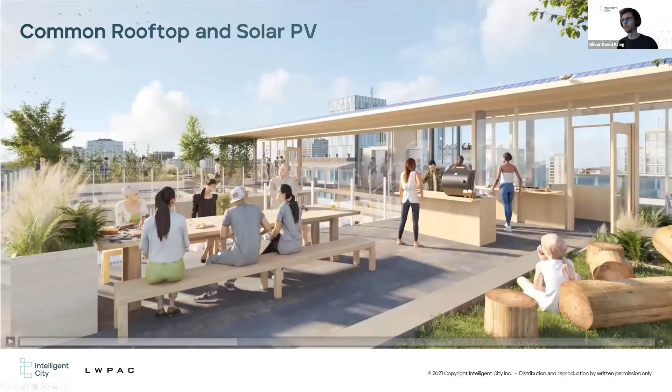Okay, fantastic. I hope you can hear me. Yeah, okay, great. OD is sharing the screen. There we go. Nope, wrong one. Wrong one. Sorry for that.

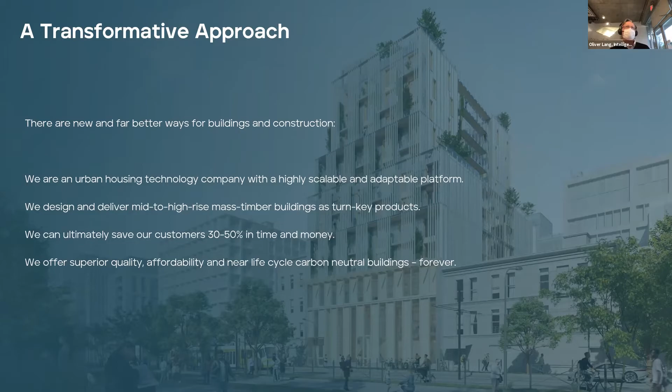Next. So you know these. I can kind of skip over this a little bit, but just as a reminder. So we focus on the housing market, urban housing market, and it's a massive market. It's an $8.8 trillion annual market in the world. We need to build over 1 trillion square feet of urban housing in the next less than 30 years now. And people and cities demand that we overcome this affordability and housing crisis that we have in almost all successful metropolitan areas in the world, and that we come up with better solutions.

And while we're facing that problem, we're similarly facing the issue that buildings, when you add in all the key issues and the key metrics, are essentially responsible for almost 40% of GHG emissions. And so stakeholders are now demanding, at least where we are located, that we do a lot better, that we come up with a path to carbon neutral building and breakthrough sustainability approaches, not sometime in the future, but really now, and get our buildings ready.

And so the industry is really facing two really big problems right now. And yet, as an industry, we're the last laggard. We haven't really seen any significant innovation that helps us, and we continue to be slow, expensive, risky, and really just one-off buildings. And even with the advancements we see in mass timber and so forth, it's still one-off buildings.

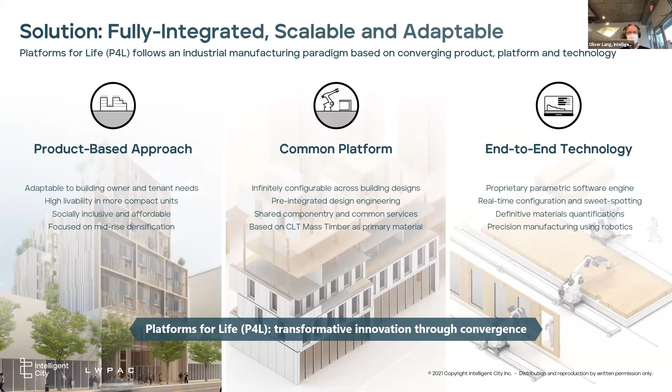So when I talk about scalability, there are two things that matter. And that creates sort of the design space for which we've created the whole system, which is in order to get to replicability in a market that requires variation by nature, because the sites are different, but also the uses are different. Housing cannot be uniform. We're not all the same. We demand the possibility for adaptability, and so do our clients, and so do municipalities,

which is very different from, let's say, if you build hotels or classrooms or anything that you could basically design on the basis of a unit or a cell. It's been useful, but for housing, that doesn't work at all. So you need something that's highly adaptable in order to ensure replicability and scalability so that you can get market penetration.

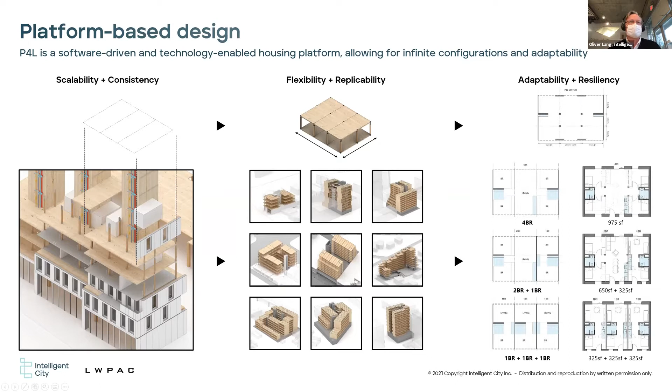So, as I said, we have a sort of front-end parametric design software engine that we've been working on for some time that allows us to set the building, fine-tune it, link it to databases about materials, carbon, cost, and the overall performance, and create a virtual twin model so that we don't really have to figure anything out on site. It's all being done and tested and integrated on the computer, and from there it gets reported out into industry standard BIM models or into machine code for the robotics.

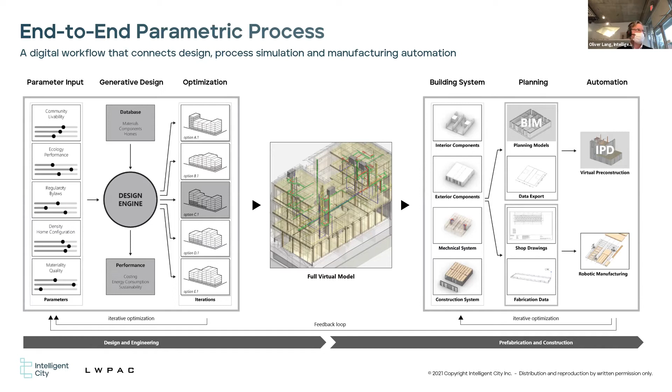So there are three main issues where we have our focus, because that's where we ultimately need to get the product to. Our customers find mass timber very sexy, and it's all wonderful, but at the end they really care about affordability, sustainability, and livability, and creating communities, right? And that's what we have to create for. So let me quickly walk you through that and how the system helps with these three issues.

In this approach, to get to affordability, we need to get multiple benefits going at the same time, because right now the way the industry works is really only about what's your dollar per square foot, what's your cost, right? And it's very hard to have any meaningful value discussion. And with mass timber, we have the possibility to get to that.

So buildings need to stay flexible so they can be adapted, and then we use building science to create better longevity. So that means we have to work off-site. We have to prefabricate to integrate quality control and get the speed advantages. And that's where the material shines, because we started out looking at prefabrication of steel and concrete, and none of that really was great.

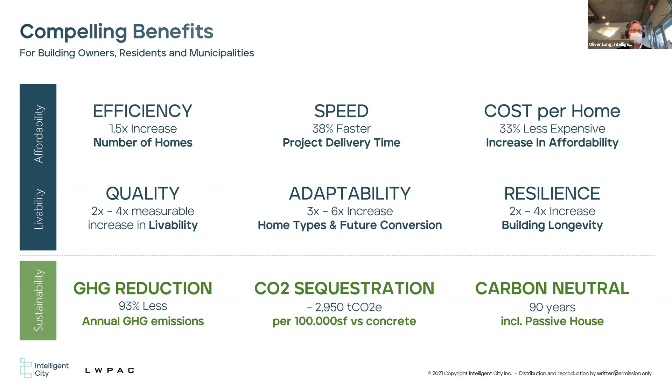And then there's the efficiency I talked about. So we've spent a lot of time looking at that integration of systems and how that works between prefabrication dimension, what you can ship, what people want, natural cross ventilation, access to daylight, flexible floor plans, to make even a small home usable for a couple or with a small child and so forth.

And how can we change it? And so while going through all these different typologies, we can find meaningful savings in the efficiencies, and that of course brings down your cost to rent an apartment or buy an apartment quite dramatically.

So the other issue, when you use an integrated approach where you not just think about the system and the prefabrication at the end of the chain, but you take prefabrication to the beginning, and you therefore have the possibility to read out all critical project data at the beginning, you can start to show people not just what it will take and cost to build it, but in fact what it will take and cost to operate it.

Because at the end of the day, what's interesting about buildings is that essentially you can bring down the discussion very much to a question of geometry and physics, and you can use that in computation and through math and intelligent algorithms to really understand these buildings in a much more complete way and link it to climate data and everything that's necessary to determine this.

And of course, there's the cultural dimension, and you want to have people being happy. But we feel we can even go as far as to bring ideas of computation and quantification to the qualitative, like livability issues and daylight and everything that sort of makes us comfortable in a building.

So the integration of the thinking really leads us to an incredible amount of efficiency gains across the board, because we know from the beginning what the prefabricated component will be like and how it will integrate. But the computational power allows us to work through that, even if the buildings vary from site to site. Next.

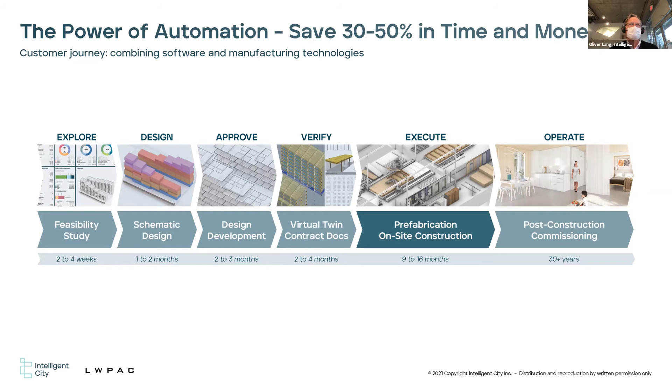So we don't just design one building, we go through a whole range of them. We make sure that the building stays consistent and then we can help.

I think you cut off there, Oliver.

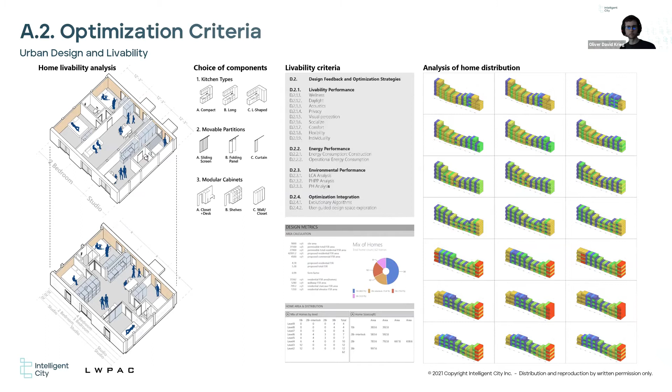Next. Okay, so the power of prefabrication is then really that you can find these sort of compounded efficiency gains, while in comparison incumbent buildings, at least in our part of the world, we see consistent cost escalation because of labor shortages, and prices in the Pacific Northwest, like in Vancouver, keep going up by about 5% a year for construction. And using data from other industries where automation has been deployed, we reduce the cost of building for the hard cost and the soft cost.

But there's the additional effect of the life cycle cost, which really matters for our clients just the same: when you do a building and you can quality control it, and you can extend the life cycle from 40 years to 100 or 120 years by using offsite prefabrication, building science, and quality-controlled material like mass timber, you can dramatically decrease the depreciation or increase the value retention in the building, reduce your operating expenses and maintenance cost, and generate data about this.

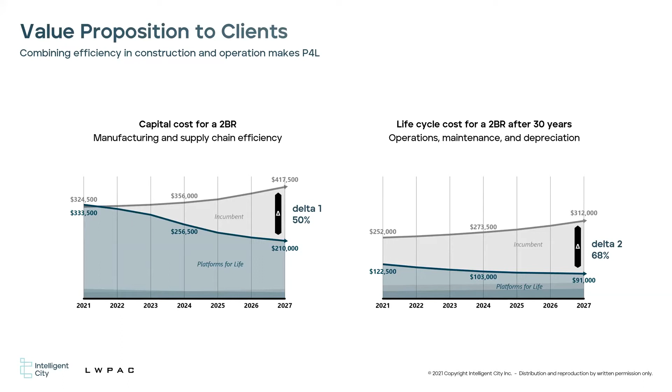Because what you have to have in mind is with this approach, you give your clients not just another one-off building, you give them eventually a portfolio of buildings so that the parts of maintenance become interchangeable, and the operating software that they use or that we can supply to them, all of that starts to work together. So the idea of creating something that works as a product across multiple buildings is very important, I think, in order to become successful. Next.

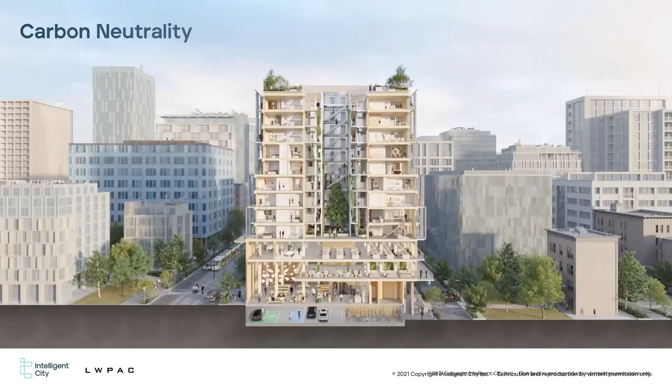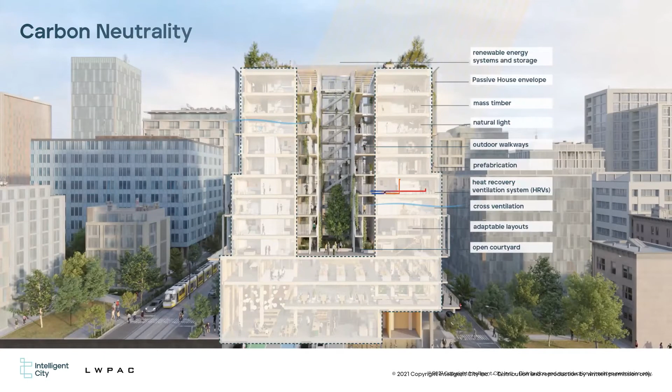So then carbon neutrality. Policymakers increasingly demand it. Next. And we need to be able to supply that. So we take a very holistic approach in this by looking at the building from natural cross ventilation, passive systems, elimination of cooling and air conditioning, proper orientation, solar shading, and basically they're full passive house buildings. All our buildings are that.

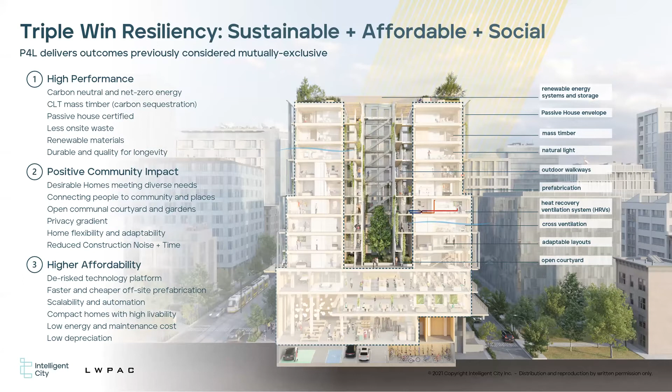And then the possibility of carbon sequestration in the building. So when you compare an incumbent concrete building with a building like we've done, in terms of the embodied, the operational, and the behavioral carbon, we could demonstrate that we can get to a carbon reduction of 93%. And it is one of the reasons why we were named in Canada a winner of the Breakthrough Energy Solutions Canada program.

Then Bill Gates, as you know, started the Breakthrough Energy Ventures in order to address climate change. And they approached the Canadian government and said, show us your 10 most promising early stage companies in the clean tech world that can demonstrate that through scalability, we can get to a measurable reduction in carbon emissions. And so scalability was sort of the key for us to win this competition, to win this very significant grant for us, and demonstrate through very careful calculation that with these buildings, in fact, we can get to that life cycle carbon neutral paradigm sooner than later.

And more importantly, that if we don't, as an industry, no matter what we do about battery technology and solar and wind and so forth, we can't get to our targets by 2050. We have to do something about the building industry. Next.

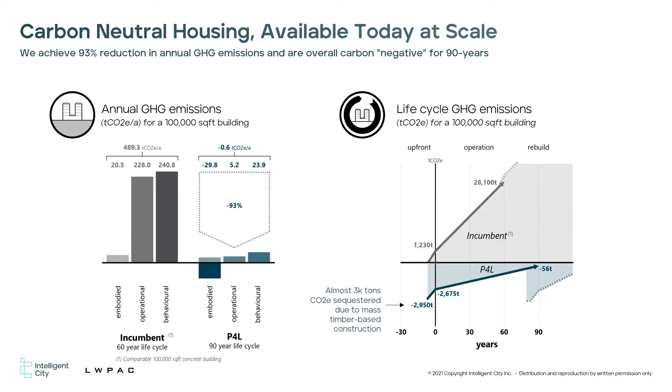So obviously, I'm preaching to the already converted here, but the possibility I want to highlight right now is this sort of development of a dynamically expanding industry where we, I think, can all work together by really focusing on scaling, because if we want to be able to win people over, we have to demonstrate collectively that the gap between the status quo and what we can do is so significant, the improvements are so significant, that there's just no point in keeping doing it the way it was done before. Next.

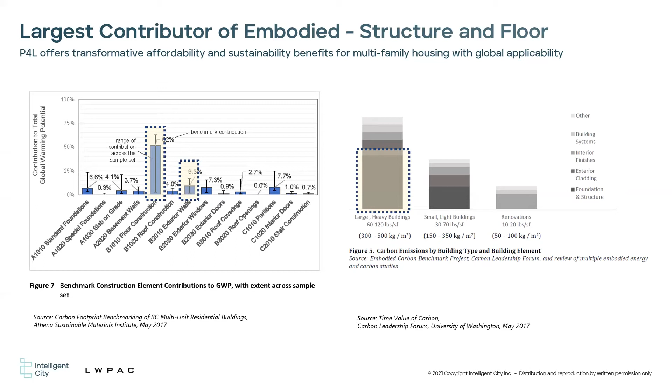The embodied carbon footprint is really largely in floor construction and wall construction, and that's why we decided also to focus on that particular part. Next, I gotta go a little faster here, otherwise it will be going on for too long.

So we analyze the form factors of our buildings very carefully and look at comparisons, but also had a lot of surprises where we realized that it's not just like in any passive house, that the cooling loads and heating loads of the buildings are such that if you can deal with natural ventilation in a very good way, then the form factors can be easily mitigated.

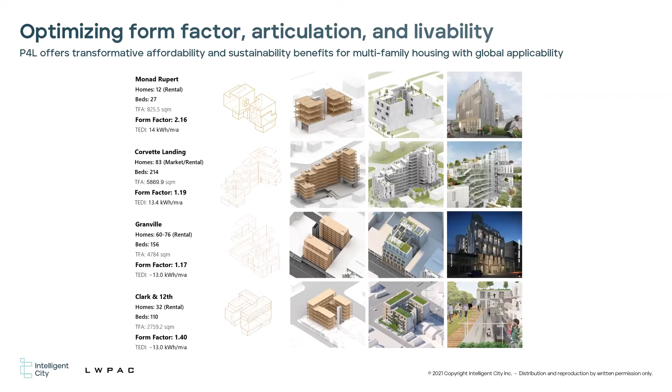So the solution is more complex than people think. Often the thought is, let's build passive houses with the most minimal amount of facades and envelopes, but the reality is that that doesn't necessarily get you there. So we optimize the buildings around the issue of form factor, livability, ventilation, and elimination of systems, that I wanted to sort of stress. Okay, next.

So a couple of quick words on livability, and then I'll let OD take it away. Livability matters tremendously because at the end of the day, no matter what kind of materials we use, what process we use, all of that is actually secondary. If people don't like it, they won't use it. And then they will abandon the buildings, and that's the biggest environmental thing that we could do. So we need to create buildings that people embrace. Next.

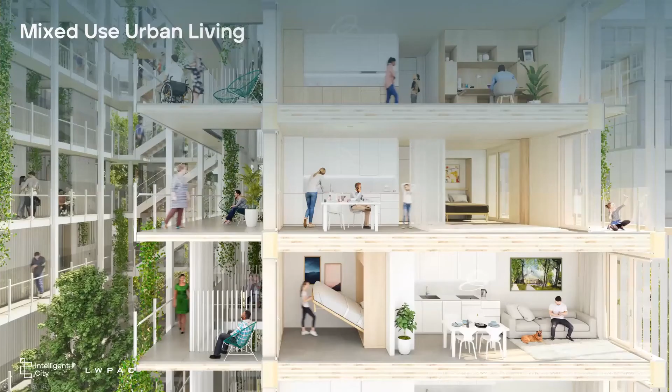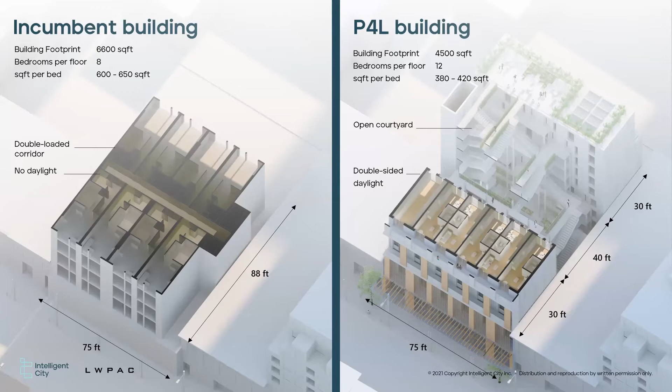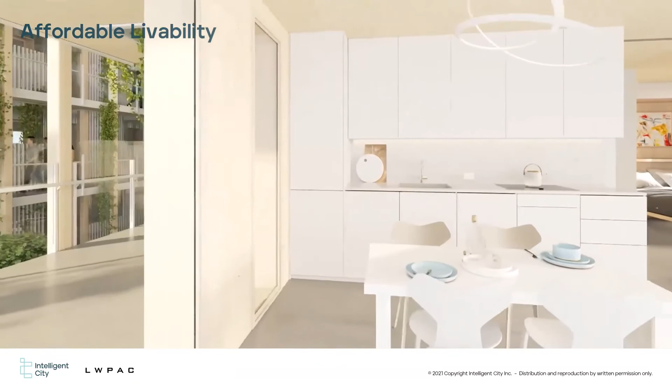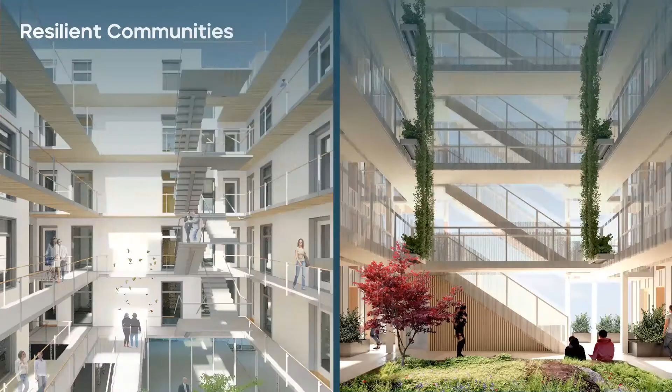And that means it has to have sufficient variety and adaptability in it, and it has to give us a path to create integrated communities. Next. We emphasize, as we showed in the image before, that the quality of very, very compact homes matters, and how it relates not just to the home itself, but to the creation of community. And so when we designed the product, we were always cognizant of the fact that unless we do that, we're ultimately not going to be successful.

And our clients really, really like this aspect. They want to create communities. They want to create meaningful product for their tenants. Next.

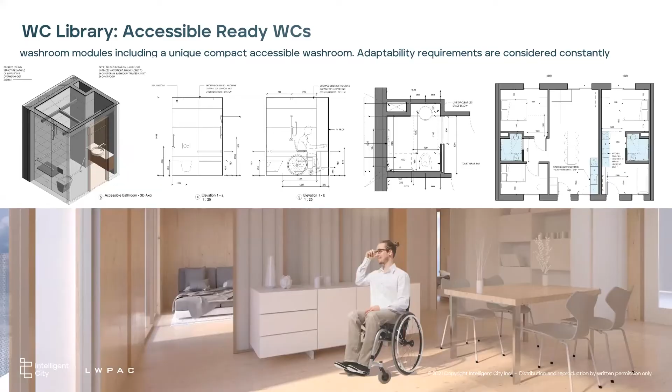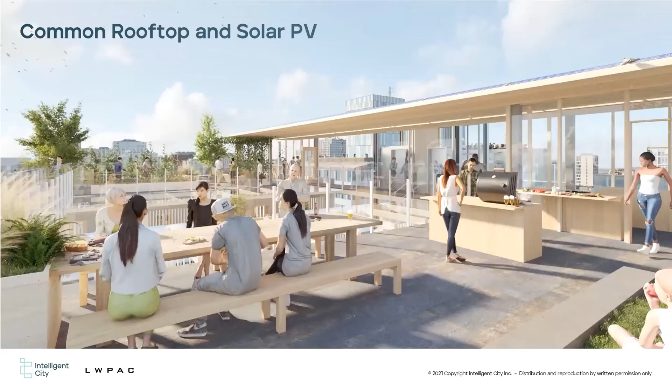And with these kinds of features, when you prefabricate offsite and you focus on a product, you can build accessibility not just into one or another apartment, but you simply make it a universal rule that all of them are accessible. So a small apartment, next, or a larger apartment, they all can have these qualitative features if they're built into the palette of what we do. And so can the possibility of common amenities and so forth be built into a product-based approach. Next.

So a few lessons learned that got us into what we're doing. So we started out with sort of a one-off building that was beautiful. People loved living in it, but we couldn't repeat it. It was just totally impossible. The industry was incapable. We couldn't find trades. We built community, and that was great. And it worked well, but we couldn't repeat it.

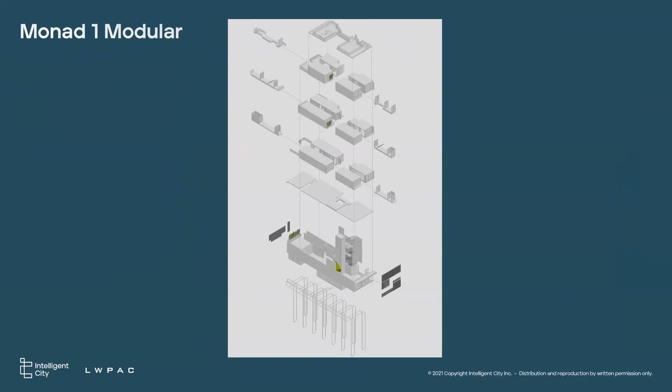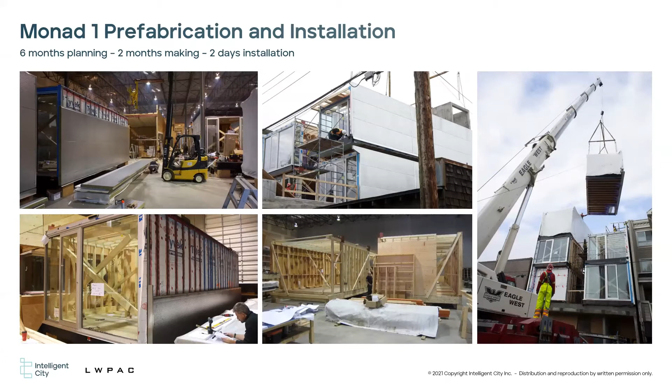So we started out next with the offsite volumetric modular, came up with the whole system, even made it flexible to have them sort of one-sided open, so that you don't live just in a box. But we found it very spatially intensive to build. It required a lot of manufacturing space. It was slow comparatively. And so the lesson learned from this was that wasn't the right thing to do.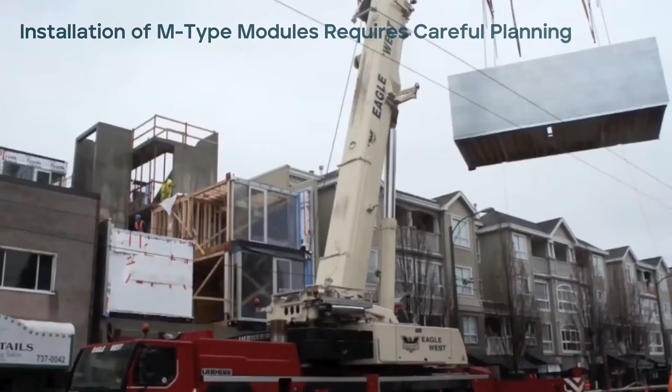But we did learn a lot of lessons about how you have to think differently as a designer when you do offsite prefabrication: logistics, shipping, installation, inspections. What if you conceal something? You have to open things up again. We learned that you have to be incredibly proactive when you engage in the world of offsite prefabrication. You really have to change your mindset. You can't think that somebody's going to figure it out for you. You have to figure it all out upfront, model it through.

But there were some great things. This building came together over the course of 36 hours and was all put together quickly. And we enjoyed the quality control, the integration of details that you would never dare to do otherwise, the flexibility of the space, the accessibility issues. So that was all successful and worked really well. But there were important lessons learned, and one, which is my last couple of slides here, is the notion of adaptability. So it has to work across a number of different sites.

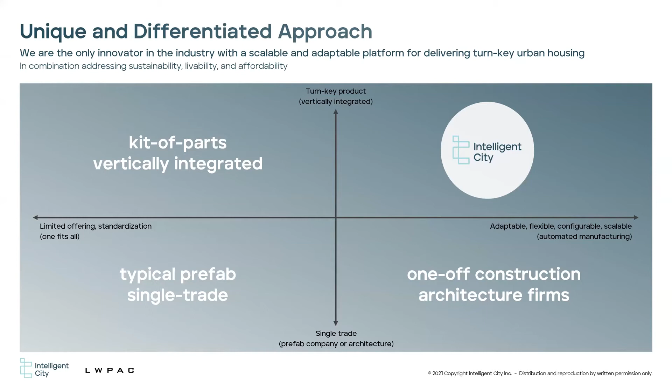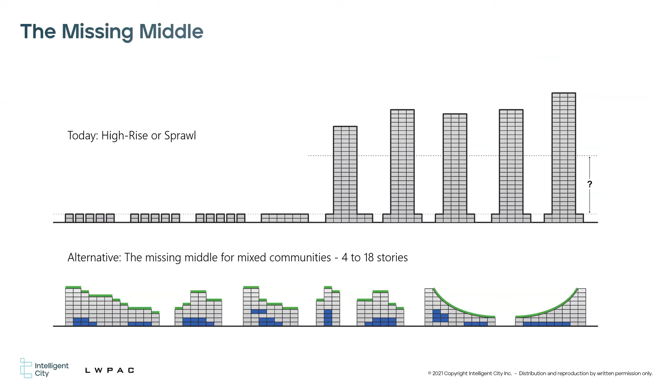We want to be able to scale into different situations, urban situations, and we want to be as integrated as possible. We found we were at the lower left corner, low rise, modular, and we want to go to the top right corner, which was integrated, more adaptable, more scalable. And we want to be able to get into that mid-rise market that we felt was grossly underserved, and where mass timber can be very viable from a cost perspective, where it competes with low-rise concrete, where concrete is not very efficient.

So we made sure that the type works through all these different scenarios, from small infill site to larger development site, from 4 stories all the way to 12 or even 18 stories.

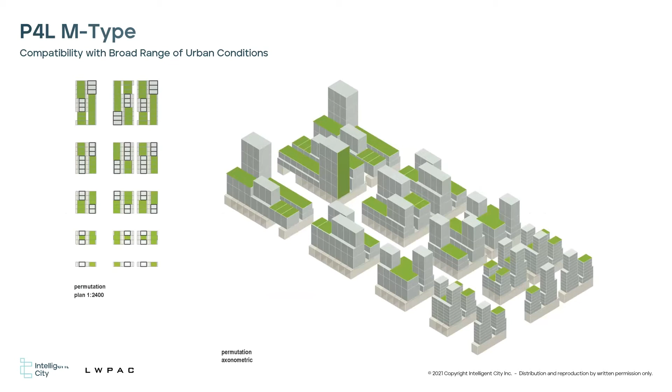So just to reiterate, the system that we've come up with that enables all of this: the future vision is that we have CLT shafts included. Right now we're using steel cores. We have a spine for the mechanical systems that others make for us, possibly prefabricated bathrooms that others will make for us. And we focus on the hollow core cassette slab that we make out of components, and then the facade panels we can add. Everything is designed so that you can also accessorize these buildings on the outside with balcony structures that are thermally disconnected from the building.

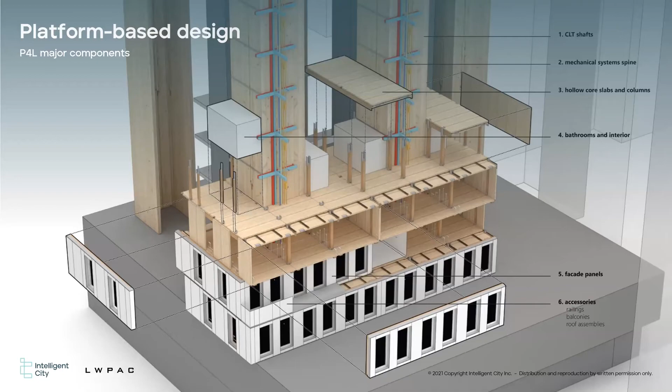With that, you can serve a broad range of sizes, from small 4 to 6 story buildings to the higher 7, 10, and 12 story buildings that are underway right now. That's really where our focus is. And then the future markets, 11 to potentially even 18 stories.

So that's on the urban scale, and then the adaptability needed on the scale of the homes, so that we can serve a broad demographic across these urban livability criteria: daylight, acoustics, privacy, socialization, comfort, choice, adaptability, and so forth, and that it works across these buildings. So we had to make sure all of that is built into the system and verified. The consequence is that you end up designing from this parametric space for the manufacturing process. So Oli, if you want to take it from there.

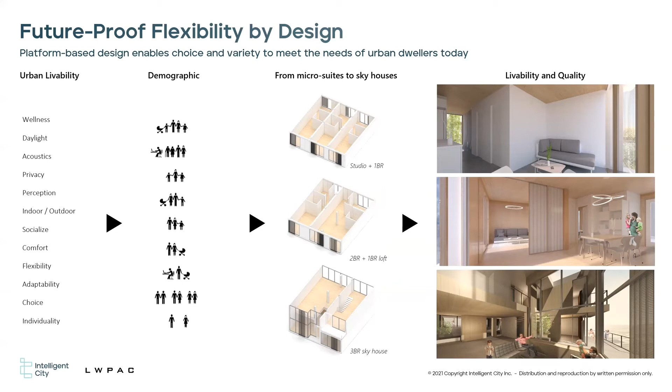Yeah, I think there's maybe a common thread in this presentation that you might have realized, and that is this ongoing internal discussion, this ongoing challenge of marrying adaptability and flexibility on one side to a process that is in some ways repeatable. And we also think that these opposing requirements might have been the reason why prefabrication and modular construction have never really taken off in our industry.

Many solutions were created in the past that really leverage the possibility of mass production, the possibility to hone in on a process and then just repeat it over and over again. But as we all know, that's not the way we want to build buildings. It's not the way we want to live, and that's not what would really be able to penetrate the market. So for us, there is a missing keystone in marrying these opposing requirements, and that is the flexibility of parametric software and automated manufacturing technologies.

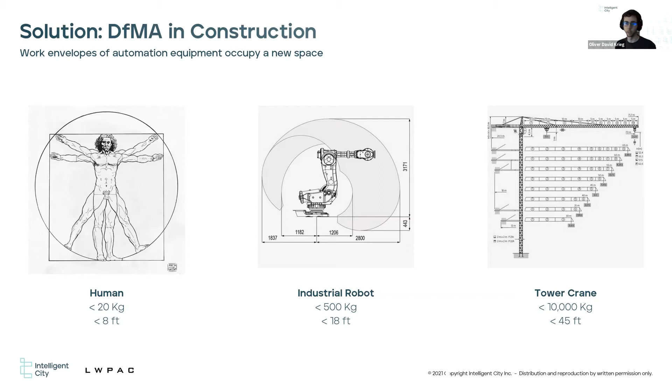And that's also where the construction industry lags behind tremendously, because many building parts are made for the human hand, for the human dexterity. Wood screws, bricks, all these kinds of typical processes when we put buildings together are very much geared towards humans. And so we need to rethink and reinvent some of these building elements and some of these building processes. And so, when you think about the typical manual processes, stick frame, ideal, right?

2x4s, bricks, they're all ideal for humans, versus really, really big elements like huge CLT slabs, which can really just be handled by a gantry crane. Building elements and sizes and processes that are really prone to be automated. They're really efficient in automation.

And so what we are doing in our development processes when we are looking at prefabricating floor panels and envelope panels is how long can we basically avoid getting into that range where only the gantry crane and the crane on the site can move these panels, and how long can we use robotics and other equipment to manipulate smaller building elements and put them together in different ways. And so that's a huge challenge, because also, admittedly, there are not many processes in place, and so a lot of innovation is happening.

And so, what Oliver said, the hollow core floor panels and the envelope panels, that's where that innovation was implemented, which allows us to automate a lot more processes for a lot longer within the factory, until we add manual processes and interface with the typical construction world.

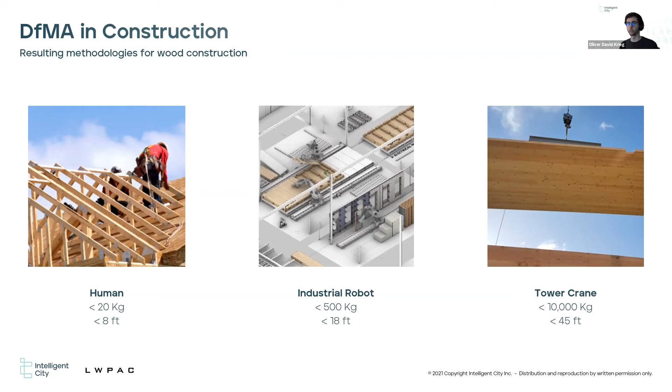So the product-based approach, the common building platform, the physical building platform, and the end-to-end technology, really what they describe is a sequence or an ecosystem of operating systems on a software or on a digital envelope, if you want. All of these things have to work together. We have to be able to design the buildings within the building system that we have developed, right? So we are basically creating our own game, if you want. We are creating the rules within that platform. We are creating design space.

And so we have to be able to explore that design space. We have to be able to work with it so that we design buildings that are buildable with our building systems. And then we have to be able to implement all these building components and building elements. We have to be able to understand what every building part in the building system does, and not only for manufacturing purposes and logistics and so on, but also for the life cycle of the building.

And then ultimately, we have to create data manufacturing operations that allow us to basically immediately output all the information required to prefabricate, plan, and construct these buildings. So this is ultimately where parametric or computational design, basic algorithmic design, we think really is the most applicable.

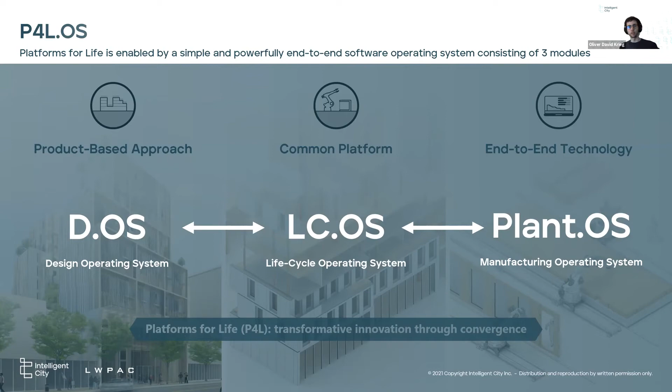You know, it's not a tool to help us design a blobby architecture. It's a tool that supports us in working with this pretty elaborate building system that we are developing. It helps us handle that information, and it helps us find optimal solutions as well. And so this is shape and reshape the building.

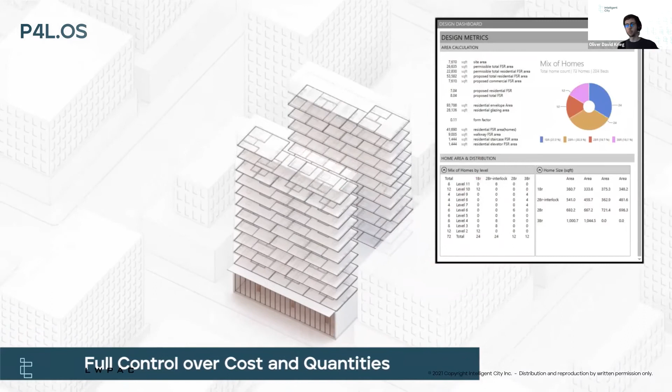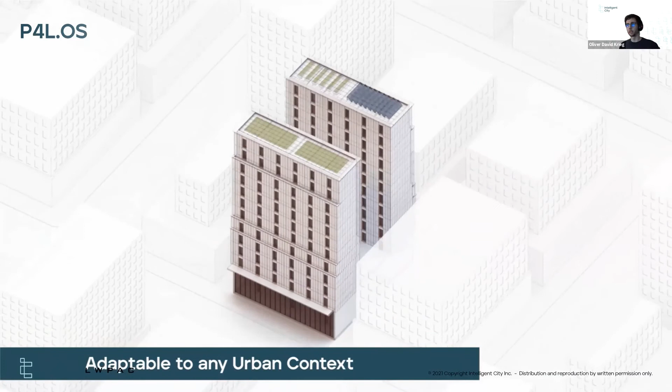We can add different home types, apartment types, like Oliver said, from our library that we have developed to match the platform. It automatically puts out all the data. It automatically applies all the building components and building elements, like you see in the floor panels, the wood, and the envelope panel. And so we can iterate through that. Basically, with each design iteration, we get all the data out.

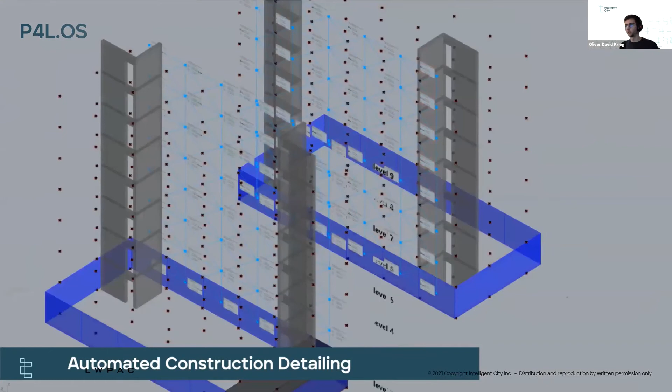So it's sort of an example process here, the way we apply, you can do different distributions, square footage, and so on. Then we move further down the line. All the building elements get automatically populated. You get an entire bill of materials out of that. You know exactly how many materials by volume, by weight, and so on.

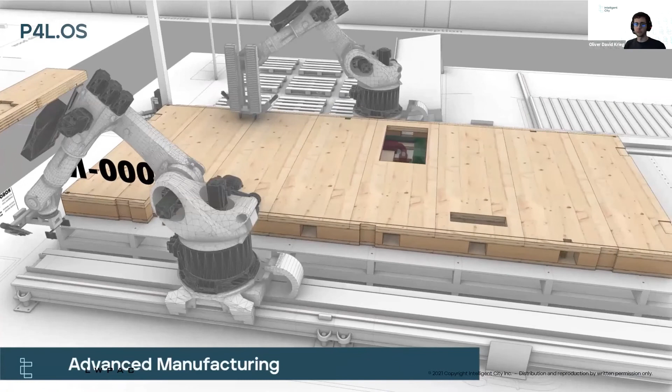You can then move further down and simulate the assembly of the building, coordinate with on-site builders and contractors, and then you move even further down and you create basically the logistics instructions with the robotics, in this case, and the CNC instructions and all of that included. So that's all pretty much connected, really only to enable fast, simple assembly on site to make all that nightmare disappear that you're usually confronted with in a typical one-off construction process.

And so now we have stitched together design to manufacturing. And it also means we have all the data that we need to make informed decisions, such as life cycle assessment, the pro forma of the building, the construction cost, the operational cost, the distribution of homes. All these quantities are essentially available up front.

And that's also a bit of a challenge. We have to sort of filter through the information. We have to develop how we collect the information, how we portray the information, so that we understand the differences in the different design iterations, and we can optimize for certain values, for certain parameters, such as we optimize for cost, optimize for certain apartment distributions, optimize for embodied carbon, and so on.

So this is where things get really interesting, where we have so much additional data available that we can really apply some intelligent algorithms that allow us to sort of augment our design process, and they allow us to be more informed about certain options that tell us the tendency here is towards this shape because of that, or this distribution of apartment types because of X and Y, and so on.

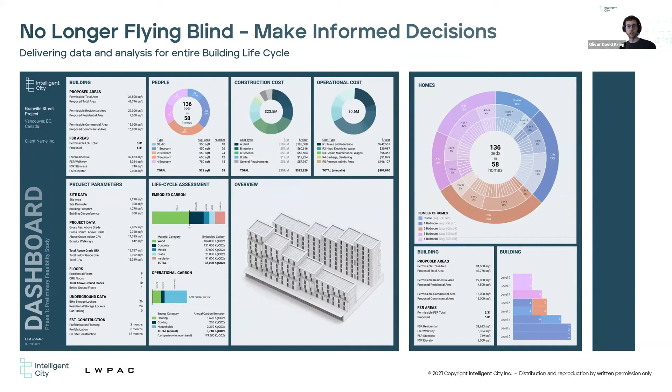So this is not to automate the entire design process. This is just simply to allow us to focus on what's important and automate everything that's unimportant, right? Automate all the stuff that is really simple and straightforward, but allow the designer, the architect, to really emphasize quality and design aspects of our buildings. And so this goes all hand in hand.

We essentially have to understand the entire prefabrication process. We have gone through different exercises of different facilities, facility layouts. Now that we have our own facility, we are currently implementing many lessons that we have learned from the last factory, but especially about automation equipment, creating different zones, stations to assemble our componentry. And so this is a bit of a mix; automation has many different requirements than what a typical, sort of manually oriented factory looks like.

But the main goal here is that the factory itself, in a way, also becomes modular, because the idea about scalability is that we can apply similar concepts, right? I'm saying similar because I don't want to say the same, because there'll always be some adjustments within our design system, within our parametric design. But we have the modules in our factory at the ready to be implemented in other jurisdictions and other areas, so we can replicate that. We can grow the factories, or just have multiple across the country and North America to serve different market needs.

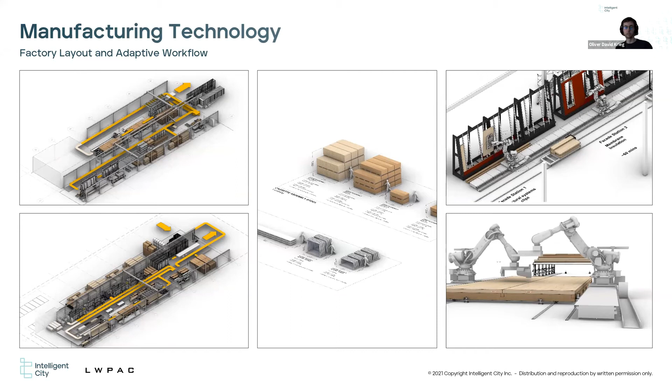And so that's a back and forth. And it's a super interesting process within the team to talk about manufacturing, building, construction, design, and software at the same time in every discussion, essentially. But it's extremely important because we have to understand the scope that we are working in, that is happening on site, that we are not acting only as the builder, we are not acting only as the architect. We look at the entirety of the project, and as such, we have to coordinate everything that's happening within a very large team.

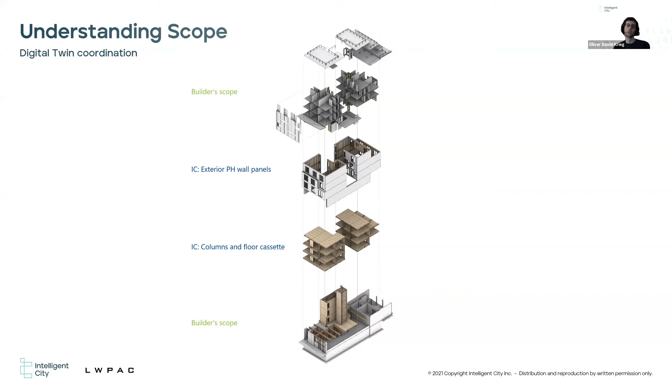The main goal here is that we create as fast as possible, basically, an enclosed shell, so that the building is airtight and watertight, right, so that we can schedule when our components come in on site, how they get stitched together, and then everything that's happening afterwards.

Oliver, you can take over if you want at this point again.

There are many barriers to achieving this goal and to scaling within our market.

Yeah, I will try to wrap up soon because I think we're moving here towards the top of the hour quickly. How much time do I have left? I can wrap it up in a minute or in 5 minutes. We typically go till 5:30. So okay. Sorry, I've got an echo again. If somebody has a audio, maybe. Okay. I'm on mute again.

Great. So I just wanted to share a couple of issues about market barriers that we've experienced, what we can maybe do about them, and then just show you a couple of images of projects we're working on. So, obviously regulation is a big one, and we've taken the approach, starting already 7-8 years ago, to sit at the table with chief building officials in Canada and talk about what mass timber high-rise really means, how it works, where, and taking the position that the best is actually just to be part of that conversation and shape that conversation instead of being on the receiving end.

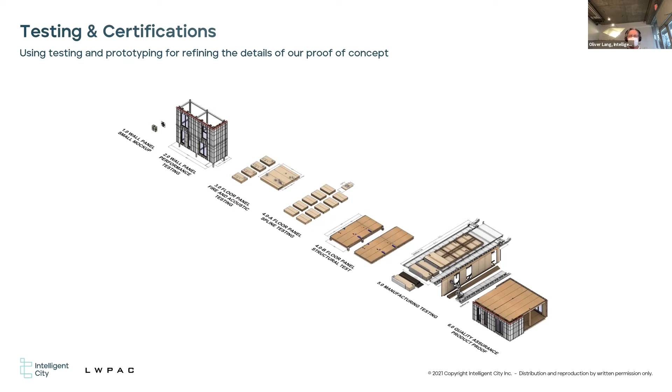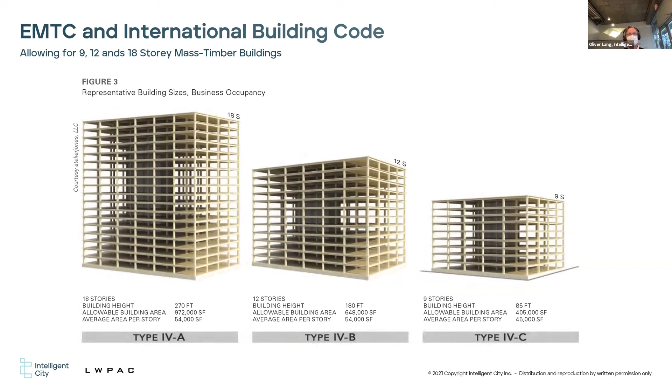And the next, you can go to the next image, so that we are ready for that initial 12-story implementation, eventually 18-story adoption in the market in the US and beyond.

Next one. So one thing we have done, we had a working group here in British Columbia between the Architectural Institute and the Engineers and Geoscientists of British Columbia Association, and a few of us, on behalf of these institutes, wrote an EMTC, or Encapsulated Mass Timber Practice Guide, of all the principles. I think it's about a 200-page book that's going to be published by the end of this month or early April. And I think it's got a lot of really valuable information in it about how to do it right, and the pitfalls in it all.

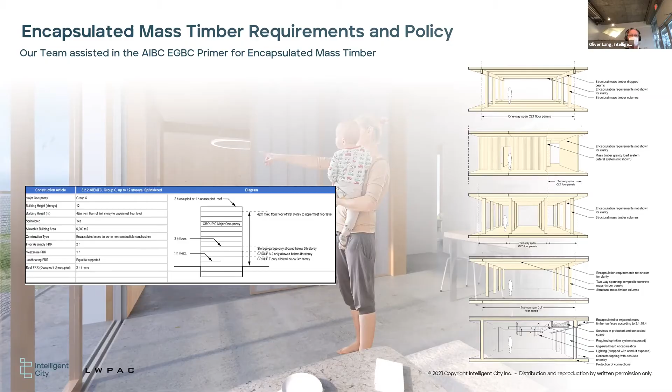And so that's part of what we're trying to do, to be a bit more on the front end and help shape it, because we also had our CBO's office, the building safety standards regulators, as part of this group, and it was a really, really good discussion. So projects, just a couple of minutes, quickly skipping through here. Next. So we built one that worked out well. Livability was great, and it proved out many of the points that we deeply cared about. Next.

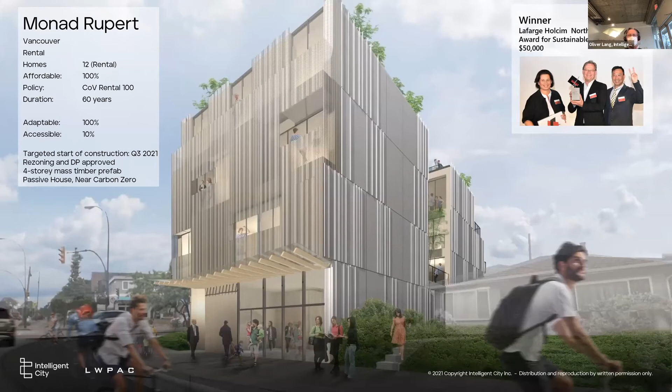And so projects that we've got on the go right now are from like 4-story rental. These are from the ground slab up, fully prefabricated through the commercial levels and so forth. We work in strategic alliance with an on-site builder for that. All our suppliers are in a strategic alliance, so we don't tender this. We just go to single source and work with them as partners.

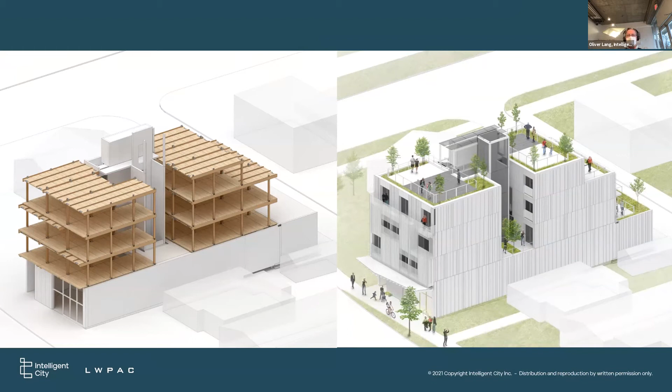And they're developing our shafts, our on-site systems, because the advantage when you prefabricate and rationalize these buildings is the foundation situations also start to repeat. Your approach to the site starts to repeat, right? You get protocol into this, and that's why you need to have partners, we feel at least.

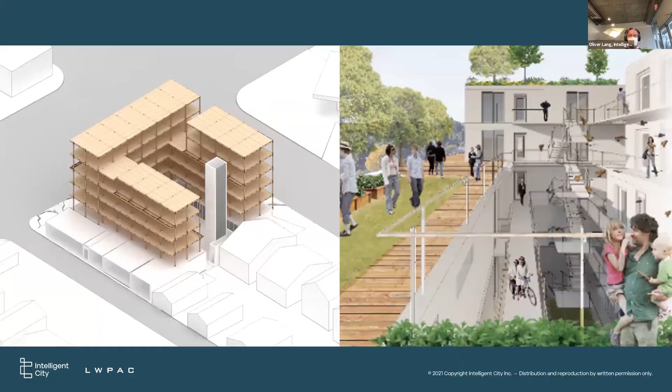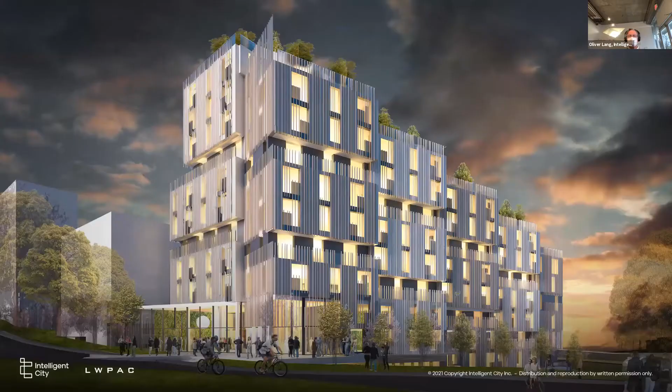Next. So there's a 6-story building. This is for multi-generational living and shared student residences all at the same time. It's affordable housing, City of Vancouver, from the same system. And then next, here is a 12-story mass timber building that we've learned a tremendous amount from. Unfortunately, our client did not have the funding and had to cancel the whole project. It was too bad, but we collectively learned a ton from it. That was called Corvard Landing, a 12-story building.

Next. But fortunately, we have a building in downtown Vancouver right now that we are delivering after much discussion back and forth with the city. It looks promising, fingers crossed that we can start manufacturing and construction by late summer. This shows a 12-story version of it. We settled with the city to do it as a 9-story, but we're still thrilled with that possibility.

And as a last word, bringing it back to a human dimension, these buildings are very rational, and to get to passive house performance, you just don't want too much going on in the facade. So from the beginning there was the possibility of a secondary, intermediate space on the outside of these buildings for balconies, solar shading, vertical gardens and so forth. When you separate it, it actually becomes quite cost effective, because you don't deal with complexity in the envelope where you deal with water and thermal issues; rather, you have the flexibility, you're liberated again on the outer skin.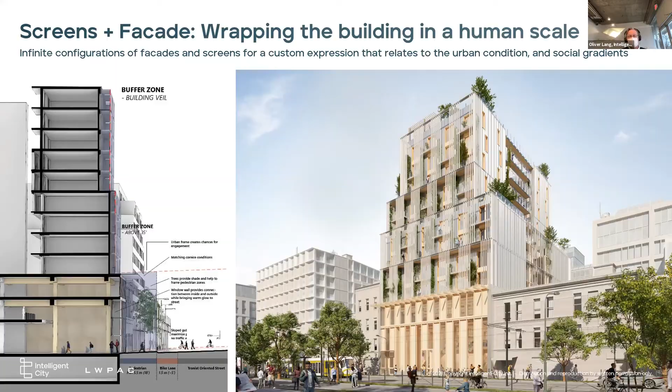And that also allows us to vary the appearance of the building, the colors and the patterns, and overall how they fit in the urban landscape. And it brings back a human scale. So yeah, that's who we are. That's what we're trying to do. I'm very happy to take questions.

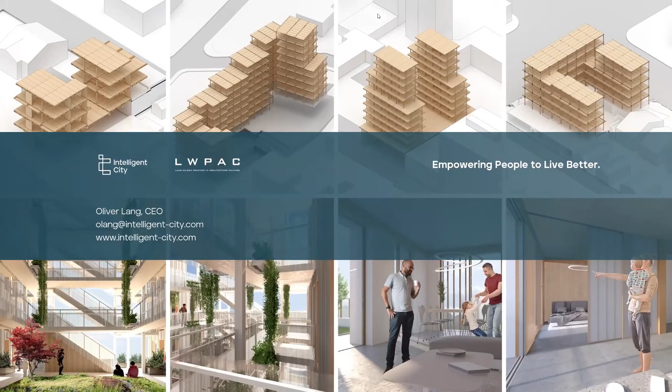Got one from Kristen Forward. First, she thanks you for the presentation. And she's asking, are you leveraging any physical material strategies for your components to link them to your data-rich models to help with construction, maintenance, end of life...

I only got half of the question. Could you repeat it, please? Sure, it's also in the chat, and I'll paste it in the chat here so you can just read it too. Oh, okay. So she's asking if you're leveraging any physical material tracking strategies for the components.

Yes. Right. Yeah, absolutely. That's exactly what our clients are interested in as well. So we try to be able to give our clients at the end really predictable as-built models with materials and systems, and stay connected with the clients for the duration of the building.

We got a question from William Silver over at Swinnerton. He mentioned that some of the slides you had earlier indicated that the construction was 38% faster and 33% less expensive, and he was wondering what the baseline was that those numbers were taken against. Concrete, light wood frame? It was against concrete and against a comparable 2-bedroom apartment in a building that is about 100,000 square feet.